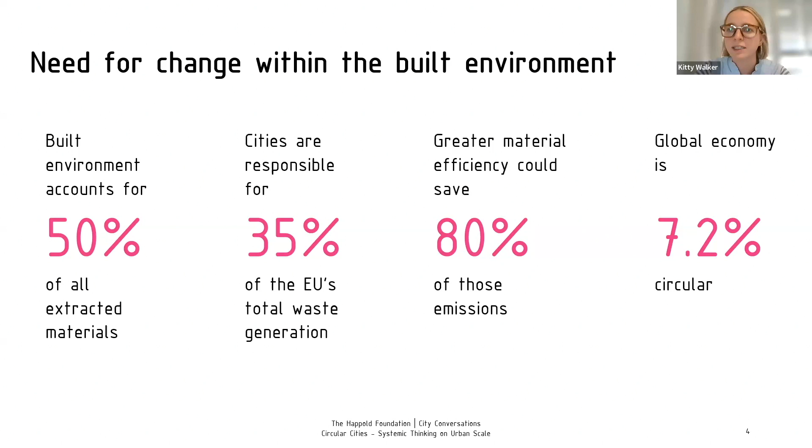However, we are seeing some shifts in the industry, with material salvaging ever increasing and recycled material development progressing. Some bricks made out of old recycled plastic and bricks made from waste within the construction sector, and some interesting projects using reused material, which I'm sure we'll hear more about later. So this is why we wanted to explore further material flows, identify potentials in material mapping, and understand more the potentials for mining our Anthropocene.

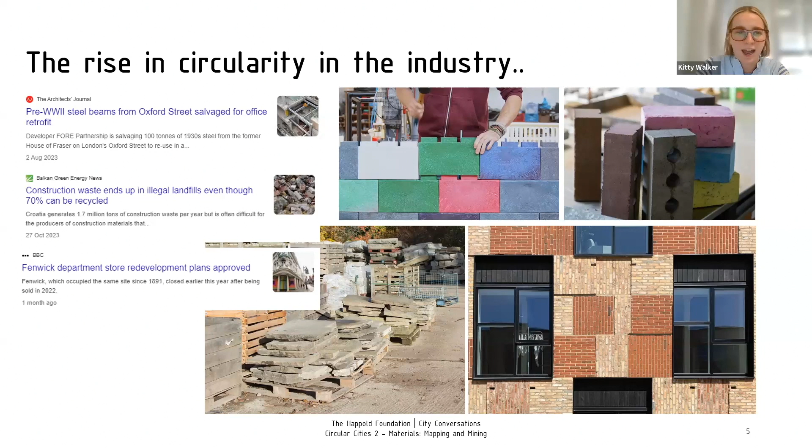And therefore, we've invited 5 fantastic panelists, as they're all experts in the industry, and we're super excited to delve deeper into the issues at hand with them. So we're going to start off with Nico Schouten, who is the team lead of the built environment team at Metabolic, where he helps governments, architects, and developers make their projects more sustainable through circular principles and systems thinking. Metabolic is a consulting and venture building company that uses systems thinking to tackle global sustainability challenges. So yeah, over to you, Nico.

Yeah, thank you very much for having me today. Let me share my screen.

Today I'm going to talk a bit about some of the recent research work that we've been doing at Metabolic. As Kitty already told, I'm part of the consulting branch of Metabolic, where my team specifically focuses on the built environment. And we do research on circularity through all layers, all the way from individual buildings to European construction sector scale. And that is what I want to talk to you about today.

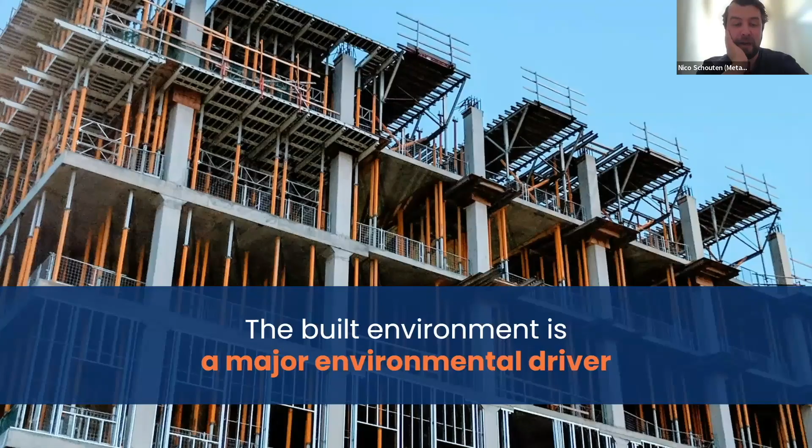So we all understand, and Kitty explained just now, that the built environment is a major environmental driver. And when we look at the annual consumption the European construction sector has, we can see that we roughly consume 1 million kilotons of material. That's quite a bit. That's enough to construct 185 pyramids of Giza every year. And to bring that a bit more into perspective, we've done a very elaborate analysis on what types of materials we are using in what part of Europe.

We visualize this in this material flow analysis, where on the left you can see what materials we are using. So you can see the majority of the materials we're using is reinforced concrete. Then where are we using these materials? We can see Western Europe is quite an impactful region, considering that it's housing a big part of the European population, but also consuming a large part of our resources from a built environment perspective. And then here on the right, you can see where we are actually using this material. So you can see a big part of our material consumption is in residential housing.

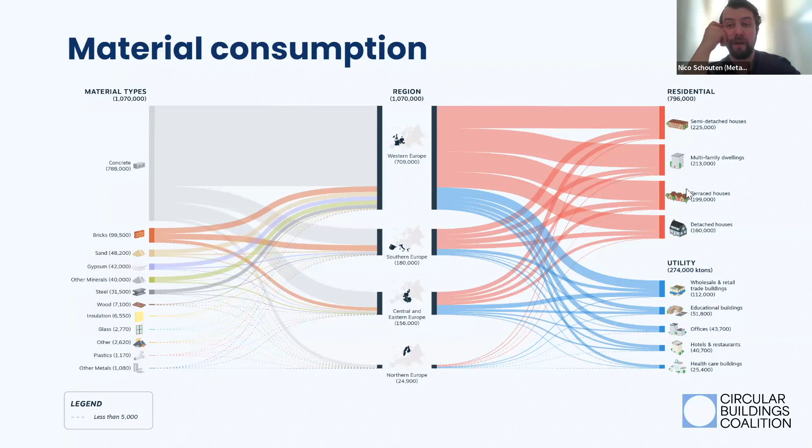We're also throwing a lot of materials away. So the European construction sector on annual basis throws away 106 megatons of material. That's enough to construct a tiny house for every inhabitant of Austria and Hungary every year, just considering the waste that we are producing. And to again have a better understanding what types of materials we're wasting and where we're wasting it, we see that again, Western Europe is a very big waster of these resources. We demolish, even compared to our inhabitants, much more than other parts of Europe. And then again, concrete is a very big resource flow.

When we look at where these materials are going, we can see that the vast majority, 70% of all the waste becoming available through demolition activities, is currently being backfilled or recycled. And the circularity of the high value reuse of these materials is currently not even known or very, very limited.

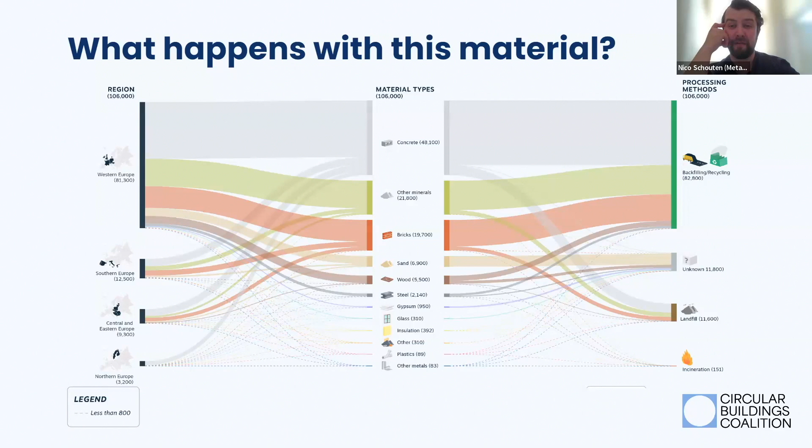This is causing a lot of CO2 emissions. So all this material consumption, if we keep building this way, we will emit roughly 7 gigatons of CO2 emissions until 2050. And that's, of course, a very big problem because it will mean that we cross our planetary boundaries. A very famous planetary boundary is the climate change boundary, where we know that if we cross the 1.5 degrees scenario that we also agreed on in Paris, if we want to remain within, we might actually have

some very serious problems. And if we keep constructing the way that we're constructing now, we can see that we will cross, as a European construction sector, this budget or this boundary in 2026. The 1.7 degree follows very quickly after, and then if we don't change anything, we will cross the 2 degree scenario in 2033. So that's quite an alarming image.

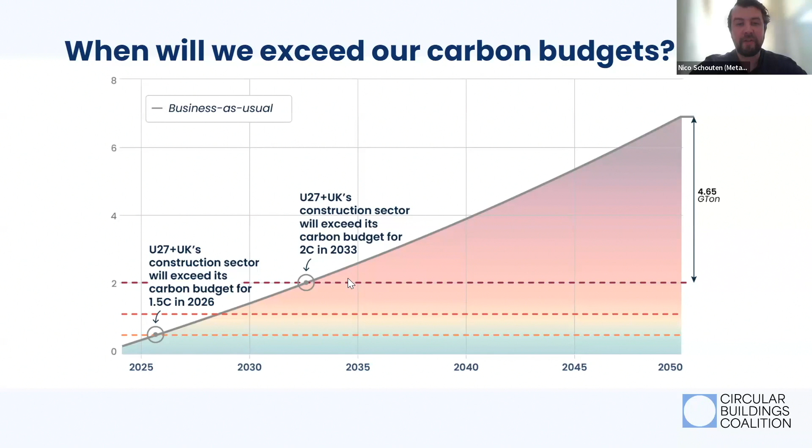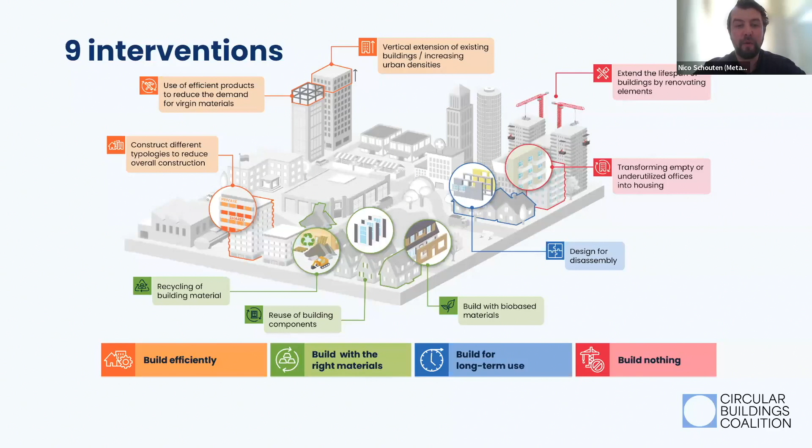And to better understand how we could deal with this environmental impact, we've been modeling 9 different interventions. So this is very broad, from transformation of existing buildings to design for disassembly, building with bio-based materials, and also the recycling and the reusing of building components. And since that's very relevant for today's topic, I want to dive a bit deeper into what this reuse of materials actually could look like when you take it back to the city scale.

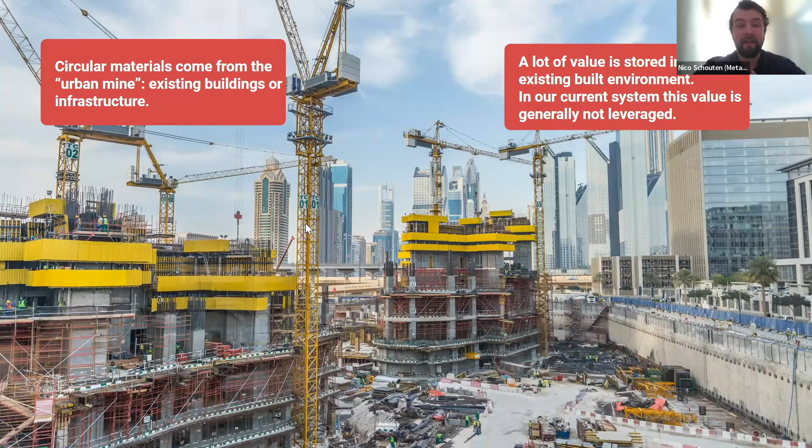So to talk a bit about cities and urban mining. When we talk about the urban mine, it's a very well-known concept, but we see really the buildings that we've constructed over the past centuries as mines for future reuse. But to do that, we need to think about a scale that reuse is valuable and even possible. And to gain a bit better understanding, we've mapped the city.

So this is a material flow analysis of Rotterdam, a city in the Netherlands, where on the left you can see all the materials flowing into the city. So energy, food, consumption goods, but also construction materials. And then on the right side, all the materials that become available on an annual basis. So a lot of organic waste, and also on the right, of course, what's currently happening. For the construction materials, we currently see that there's a lot of downcycling, which is very similar to the European picture that I just painted.

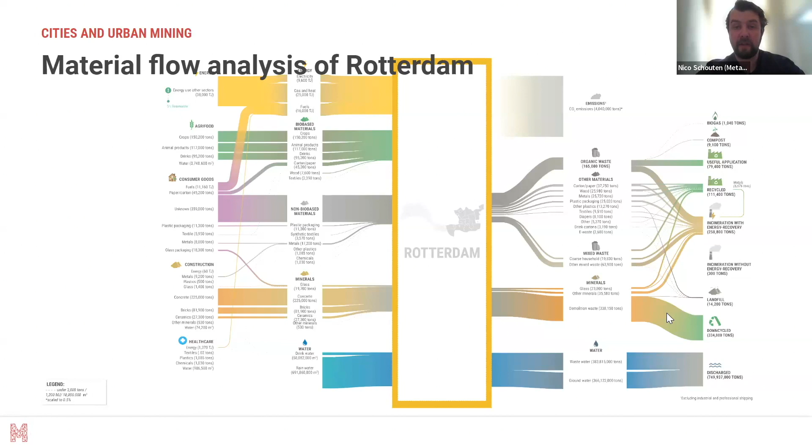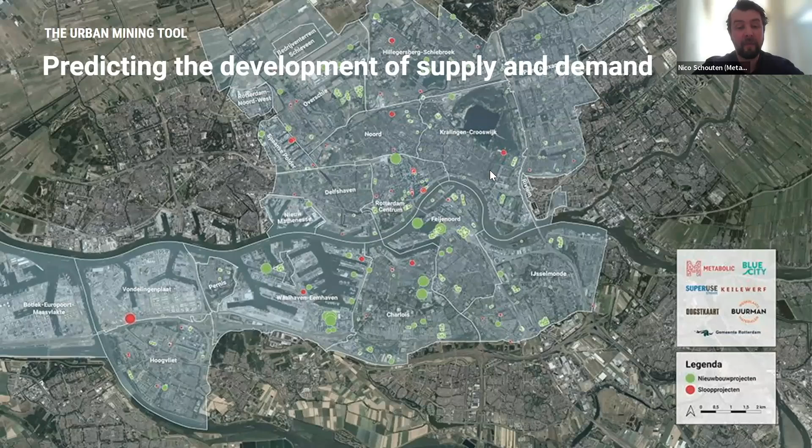How we map this material flow and the potential of this reuse is by looking at the construction and demolition plans of the city of Rotterdam. So what you see here is a map with all the construction plans, which are green, and then all the demolition plans, which are red. And when we just very quickly compare those two and try to match supply and demand, we can see that until 2030, there's only 229 demolition projects.

But there's over 4,000 new construction projects, with 250,000 square meters of gross floor area being demolished, but over 5 million square meters of gross floor area being constructed. This is already a very clear indication that even if we reused all the materials becoming available through demolition activities, we will never have enough to replace the virgin material demand if we want to, of course, also construct the housing that we need from a social perspective.

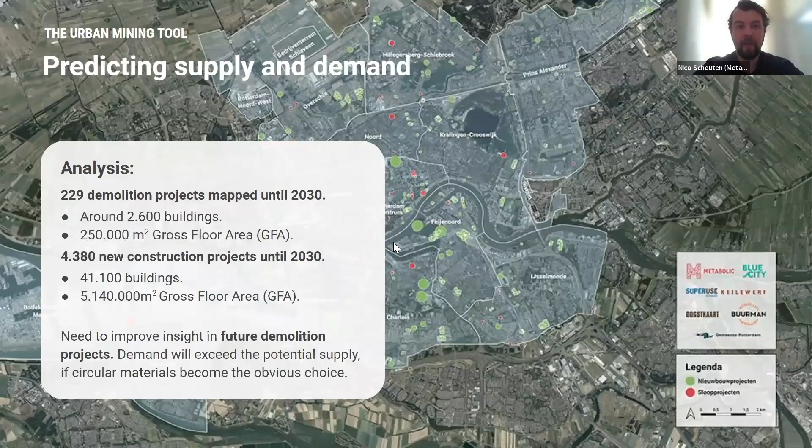This analysis also really allowed us to make a very clear spatial and time analysis of when materials would become available, because as we are still in a linear economy, we kind of have to catch these resource flows before they are lost to the linear system. And what we saw is that it does really matter when you harvest these materials or when you have this infrastructure available to close these reuse loops.

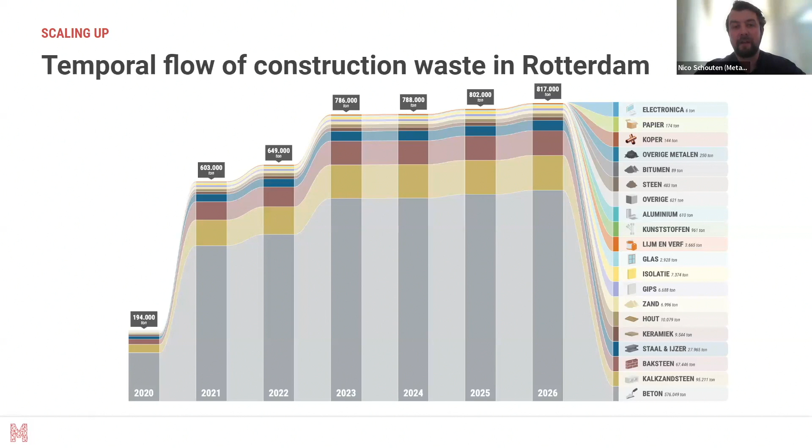So between 2020 and 2021, there's a very big increase in materials becoming available. And then 2022 and 23, again, a big leap. And this insight really helped our clients, which were the municipality of Rotterdam, to understand that they really needed to make haste if they wanted to capture all these valuable resources before they were being downcycled or landfilled.

What this analysis also focused on is that circularity is not a goal in itself. We don't have to just reuse materials. We reuse materials to reduce the environmental impact of our construction sector. And what we show here in this analysis is that if you compare the mass of the resource flows becoming available in the city of Rotterdam, environmental impact and the cost gain that you could have through reusing these resources,

we can very clearly see that if we want to prioritize the environmental impact, some very important decisions have to be made. For instance, here you can see insulation materials, which is a very limited mass, has a very high environmental impact, but has a very poor business case. On the right, we also visualize how certain hurdles would make the reuse of these materials harder. So it's about standard sizing, risk for pollution, or the warranties for good functioning of that.

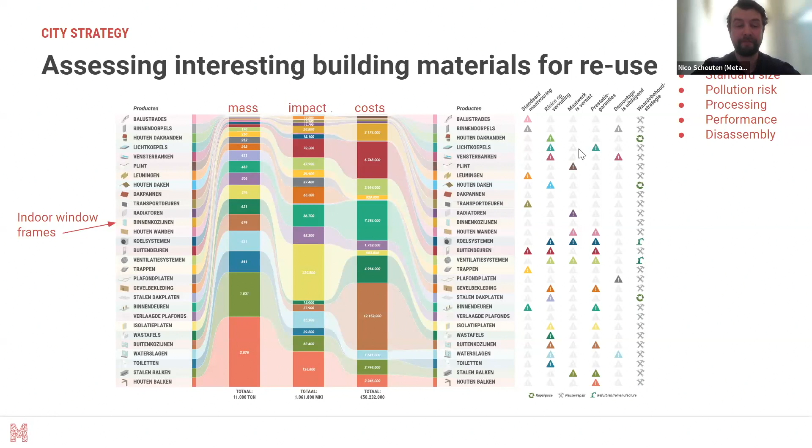But really understanding these resources and also understanding what these resource flows could look like, we then map those flows through the industrial process and profile of the city of Rotterdam to understand that maybe if you want to reuse concrete at a large scale, you really need an industrial plant where these resources could be cycled and repaired or even recycled, which might not happen very much within the city.

For other resource flows, such as doors or windows, the reuse or recycle process looks a lot easier. And then making a more localized chain actually really helps by also creating a healthy city, a vibrant city, and also a city in which there's jobs for a larger audience.

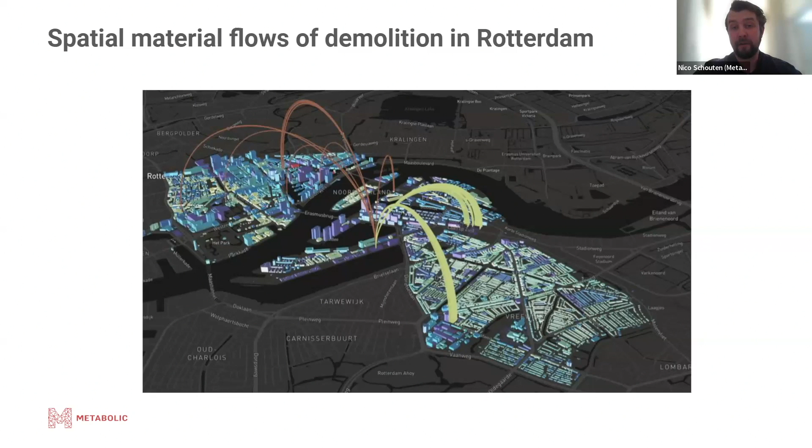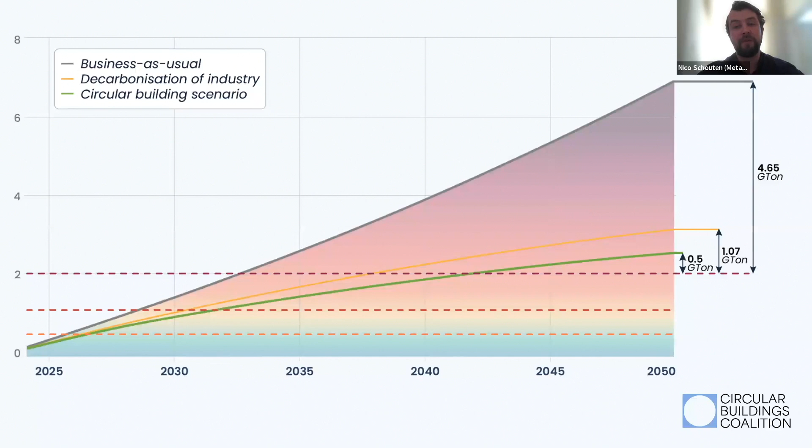Through decarbonization of industry and applying this broad range of circularity scenarios or interventions, we can reduce the environmental impact of the construction sector by 70% in 2050, and also push the deadline that we're crossing the 2-degree scenario by roughly 10 years, which means that we really buy ourselves some time to focus on further innovation and really applying the best of our skills to get a construction sector that is within.

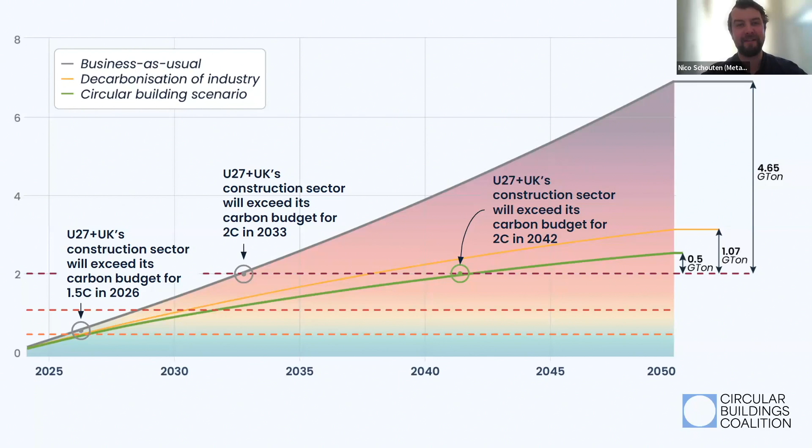That was super interesting. Thank you. It was really nice seeing all those maps and I feel like you could delve so deep into all of them. But I just wanted to quickly ask you before we move on. We've spoken to a lot of people and they've said that finding the right data and putting it to use is a massive challenge. And did you find that when you were making the maps on Rotterdam?

Yeah, so there is a very big challenge, but what we did with these maps of Rotterdam is that we've used a large database with reference buildings, which could give a first insight into the potential of these demolition plans. But then reusing these products and actually harvesting them does ask a lot of on-site scoping and scouting of materials

and also repairing them. So the work that we're doing is very much at the beginning of the process to show different stakeholders, so both public and private parties, the potential that lies before them, but then really getting on the ground and doing them does ask, of course, a lot more work and innovation.

Great, thank you. So now we're going to pass on to Andrea Charlson. So Andrea is the Managing Director for Madaster UK. She's now bringing material passports to the UK to transform how we value buildings and materials through the use of reclaimed materials and designing to facilitate future reuse. Madaster is an online registry for materials and products, and on Madaster, data is recorded on all materials and products that can be incorporated into future real estate. So over to you, Andrea.

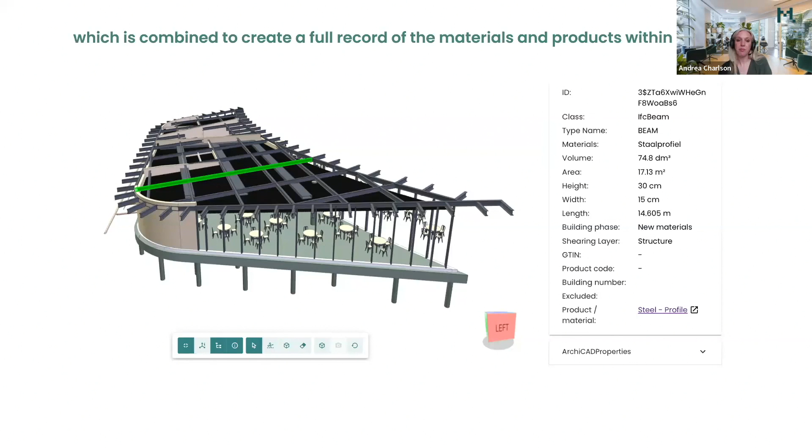Once we've got all that information, we can then start to unlock a whole range of environmental impacts and insights, such as what materials are located within the building or the asset and where are they. We can start to explore the circularity, and so that can be both what I like to call its circular history. So are those products already recycled or reused? And also its circular future or potential circular future. So are they available for recovery, and can they then be reused or recycled once recovered?

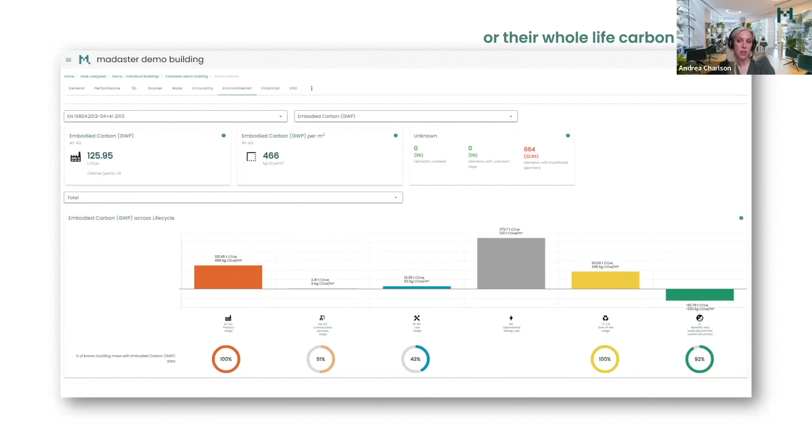We can also use the same information to assess a whole range of environmental impacts, such as the whole life carbon of both the materials and therefore the assets that are created from the materials. So once we've got that information, as well as having the repository of the data itself, we can start to calculate KPIs for the whole asset. And this can be useful to support building level reporting requirements, such as those in green building rating schemes or planning requirements.

But most interestingly for the topic of today, and touching on what Kitty was just asking and what Nico was describing, the information on the individual assets can then be aggregated across either a portfolio of assets owned by a private entity or even a public entity, or even across a geographical region. And so this is an example here where we created asset level records for all the buildings within this village, which is a subset of Heidelberg. And then we can start to unlock some of the insights that Nico was just describing, sort of what materials are in those buildings, where are they, what's their circularity potential, when they become available.

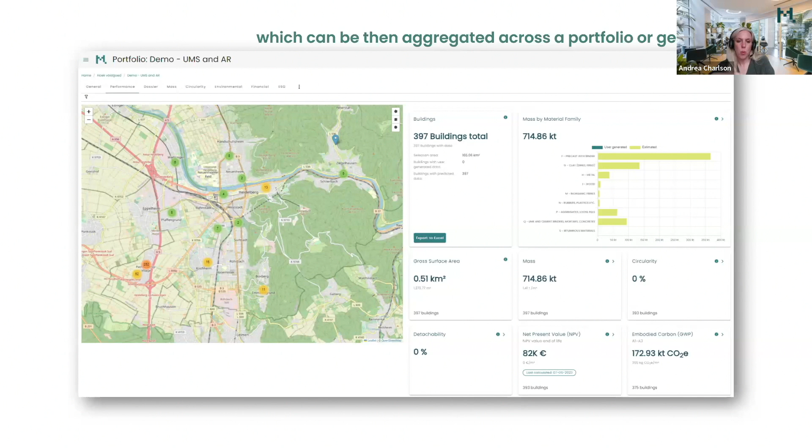And so that's kind of the mechanism of what we try to do, or what we try to facilitate through the platform. But why do we do all that is probably quite an important question as well. And the reason we do that is to provide both the data and information to support a wide range of needs. And some of that data and information helps support data-driven decision making, so to actually change what happens. And some of that is just to facilitate an easy and efficient route to reporting. The type of needs that our users are interested in are quite varied.

So we are established with the idea of promoting a circular economy, and the idea of having this information available at all the various levels, so product and asset and portfolio or region, can help promote a circular economy in lots of different ways. The fact that we can make that information available throughout the design and construction phase means that it can also be used to inform decisions about those design and construction processes. So you might want to choose to design something in a slightly different way or choose a slightly different specification of material or product.

Very specifically in London, this kind of information can help support planning requirements, both in terms of the KPIs themselves, but also the act of creating the passport and creating that record of what's in your building. And then moving more towards the asset and also the portfolio level, collating this kind of information can help streamline ESG reporting, particularly with the requirements that are coming down from Europe through the EU taxonomy and CSRD.

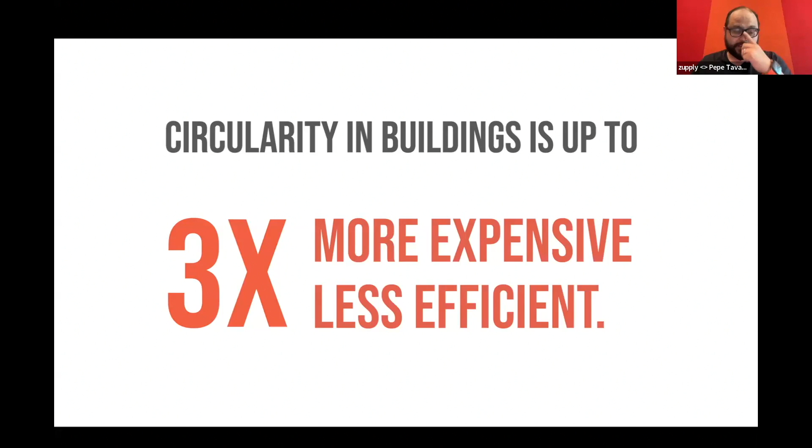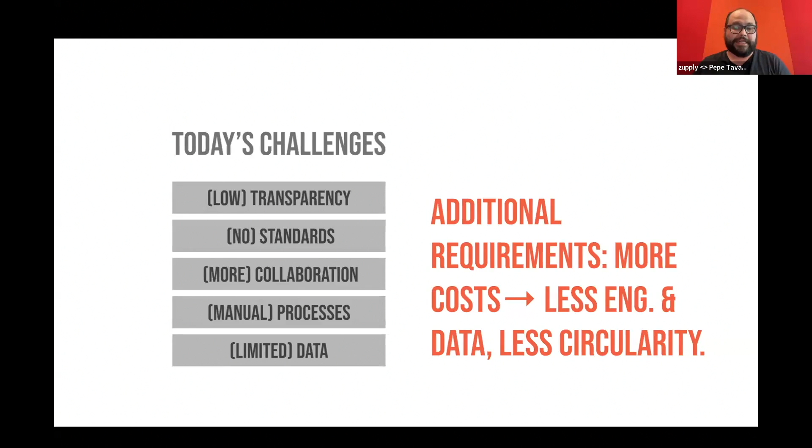In very short, what does it mean? Companies right now, all the way from portfolio level to product, if they want to do some sort of circular economy practice, it's more expensive, and that's why it's not very widely adopted today. Why is that? Because there are a lot of challenges on one side, but also a lot of additional requirements on the other. So I think it's a very simple business proposition: if there is more cost associated with circular economy, then there is less engineering, less data, and ultimately less circularity. I see that this is not very widely adopted, at least here in Europe.

Actually, the data we've seen more practically on the ground is that less than 1% of resources follow any type of circularity. And I don't mean circularity as in when it gets taken back or resold or reused—I mean even less than 1% today is getting mapped. So this is somewhat alarming, but I think when we balance this impact-driven but also business-driven situation, it's why we are not reaching that scale.

On the other side of the spectrum, and that's what we have been seeing, is that the data requirements or the engineering design requirements for circularity to happen are actually trivial. They're not crazy requirements. However, there is a lack of data around them.

So to answer these very basic questions: what's inside our buildings, what's their worth today, in the future, and what is their CO2 through their life cycle, but also their cost through their life cycle. These are questions still a little bit up in the air that, at least in Zupply, we are trying to solve. Once you add on top of that the layers of, okay, now I know what I have, now I know what it's worth, then how can I actually circulate them?

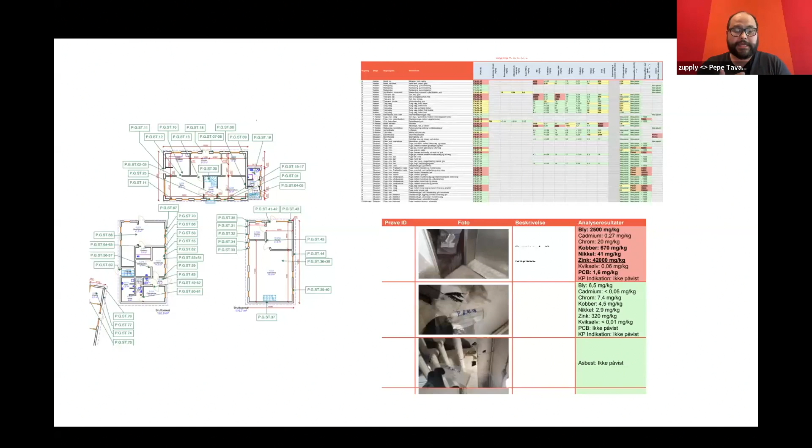Think about it: you spend 20,000 for 1,000 meters, which is nothing, and you get some report looking like this, which is basically telling you here we have X and there we have Y. There is some testing, etc. But that's what people are working with today - very low digitalization, but also very low connectivity.

And that is just, let's call it, the first step towards mining. You need to know what you have. Still, there's a lot of many other requirements that, again, are costs, are time.

Because what we have seen is that all these circular efforts or circular requirements are being taken in manual ways right now - a lot of Excels, a lot of exchanging data through emails. There is no material passport that everybody can access or dig into. It's more exchanging information through emails. Data banks look very similar to reservation systems. And this is simply very time consuming and expensive.

That's the monster we are facing. But we have tried to fix this by streamlining every requirement needed to go from what we call resource mapping to actual circularity of resources and reporting, but also from portfolio to product level. And that is what's very interesting for us, because this is how our platform works.

So we start by creating digital twins on the portfolio level of buildings - meaning more or less what would be in there. We use a lot of models that we have created to actually fill the data blanks on portfolio, building, and product level. And that gives us the resources to be ready for circularity, what we call them.

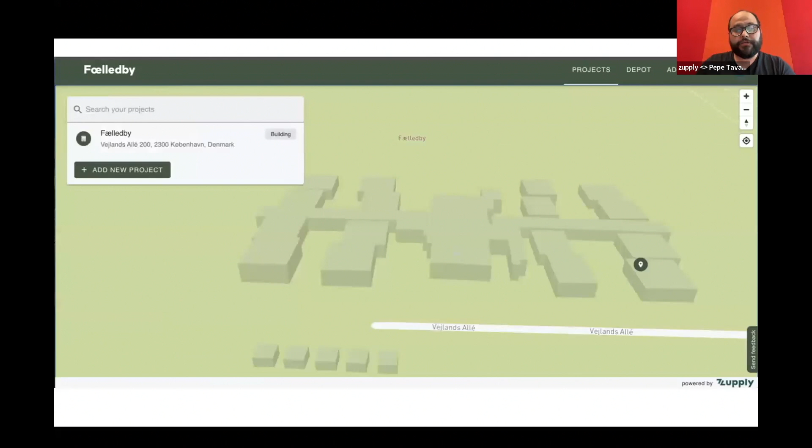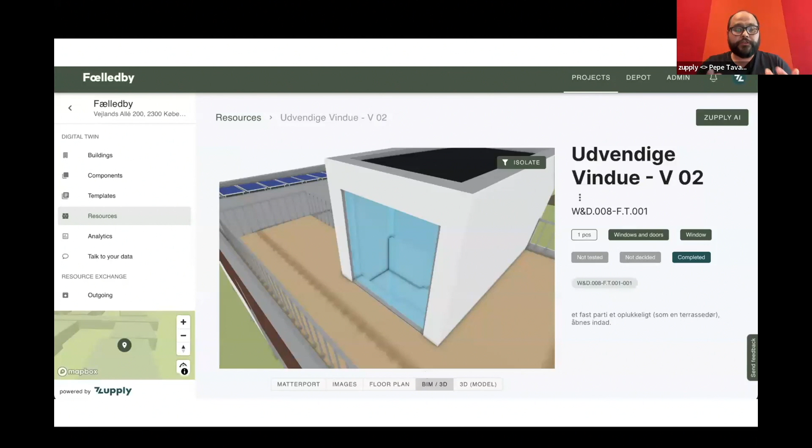Our databases, drawings, whatever information, you basically dump it into the platform. And that gives us a very detailed resource mapping, so detailed that we know not only the product level, but the composition, cost, carbon, anything that you can think of that's needed in a material passport. We are able to get it because we use a lot of AI to do so.

We are so excited about what we are building that we have actually proven to give this data widely available. We have an embedded engine that anybody can access and ask any question about the material passport or the portfolio level. So right now there is no more exchanging or handing over the material passport, let's say.

So right now everybody can access and collaborate within the same platform, which is a difficulty that we've been seeing when talking about circular flows. We've gathered so much data that right now we're not doing digital twins only for existing buildings to be demolished or renovated, but everything that gets newly built or renovated is digitized and stays in our digital twin, because that allows for future circular flows, such as product as a service and design for circularity.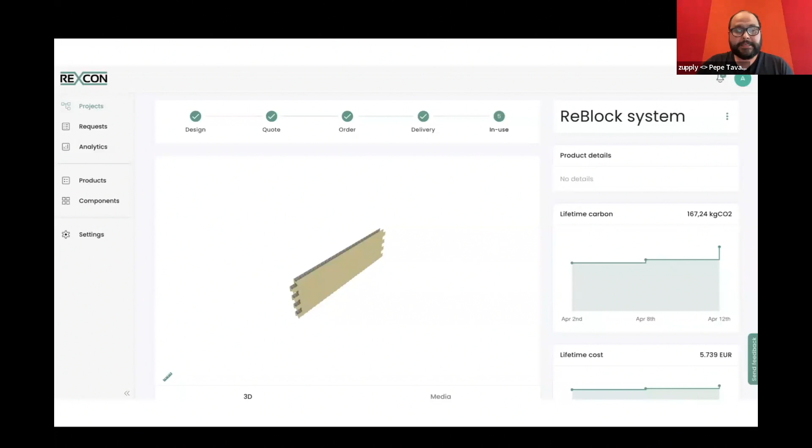We actually are doing it already, where companies are doing their full circular operations with our platform, but instead of starting from a mapping, starting from the moment they produce or manufacture the products all the way to the take-back. That has proven to reduce the cost and makes circular economy in building products competitive. We've proven with the most important companies here in Denmark and also in other places in Europe that they are going four times faster and more affordably with the circular economy.

So meaning we're almost there in terms of competing with business as usual, and the impact is there. Once you make it competitive business-wise, we have proven that we can reduce up to a quarter of the waste that would be generated. And that is just awesome. We are actually making circularity happen.

Thank you very much. Before I conclude, companies at the portfolio level, like Ikano, the IKEA real estate developer, are actually telling us the same thing - if you go from portfolio to product data-wise, you can make circular economy efficient, and that's what we've been trying to do. Thank you very much, and that's all for me.

Thank you, Pepe. That was great, super interesting to hear what you're doing. Similar to what I was asking the others about with the data, how do you ensure accurate data? I know you're making assumptions, but are you partnering with architects or part of the design team? How is that coming to you?

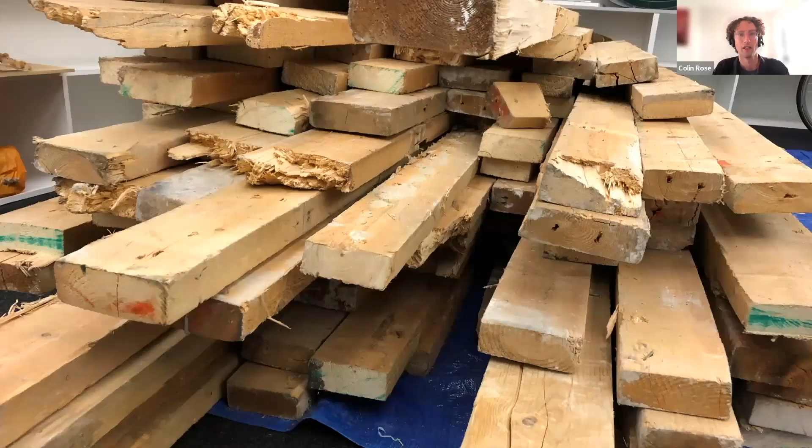But not having that sit in an isolated way in a PDF, but instead being submitted to planning and then collated into some overall map - not a map of everything in the existing building stock, but a map of the most pertinent information, because these are the materials that are soon to emerge from demolition.

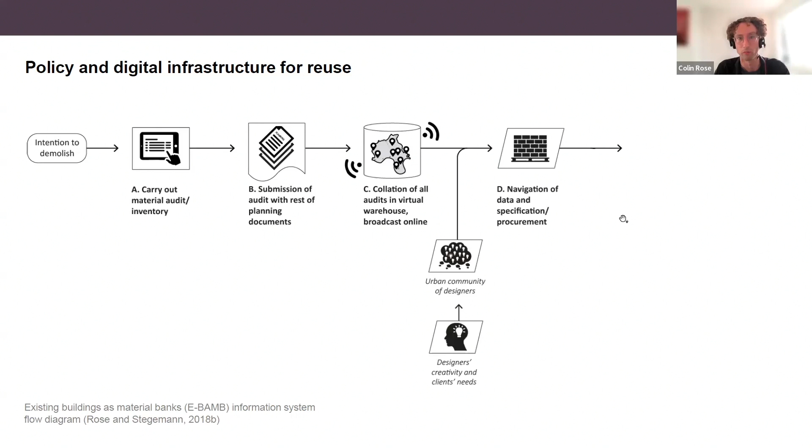Which then, once it's visible and mapped in that way, gives you the ability to leverage all the creativity and community of urban designers who know all of the specific requirements of their clients. So instead of an auditor trying to anticipate what's reusable and what isn't, you use this collective intelligence. That can then lead into either direct reuse from one site to another, but probably more likely at scale, a third-party upcycler or someone doing repurposing or some kind of value-add, which enables the end user to have confidence in the quality and the timely quantity of materials getting to the new construction site.

And then the system can have a kind of feedback loop so that it's learning over time and becoming more intelligent.

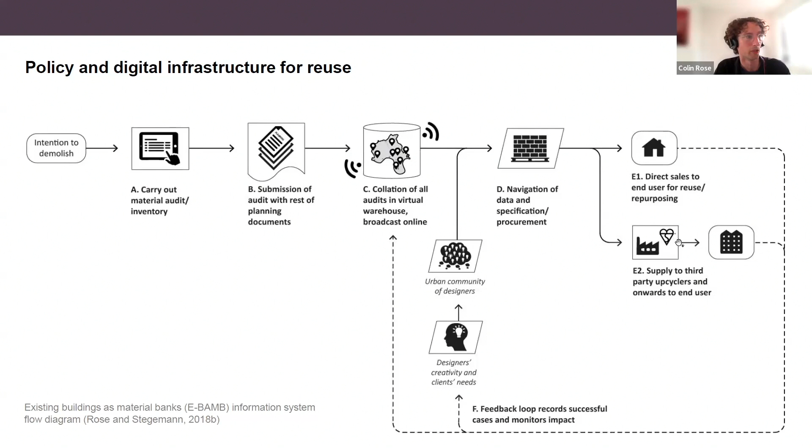So to sort of sketch that out as an overall way to stimulate a reuse market, I think I've talked there about policy to drive better information about materials and feed that into a digital infrastructure. It's also fired up. The system is incentivized through policy that drives more reuse, for instance, by having separate reuse targets to recycling at the supply end, as well as the demand end, reused content as well as recycled content. But importantly and crucially, I think, new material technologies and enterprises at the middle who really make this engine turn over.

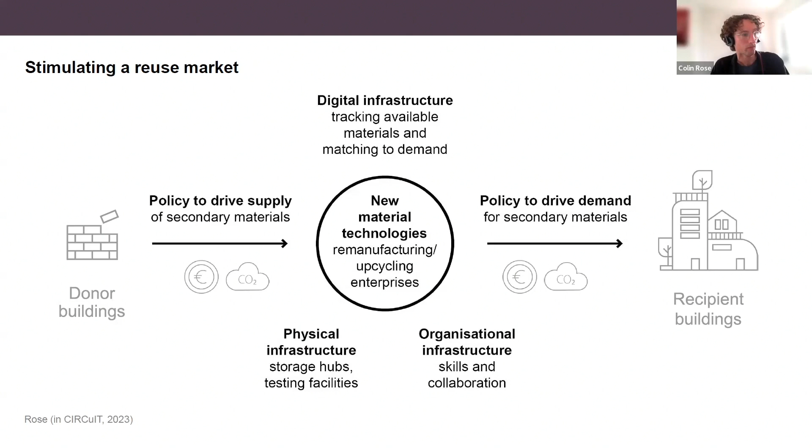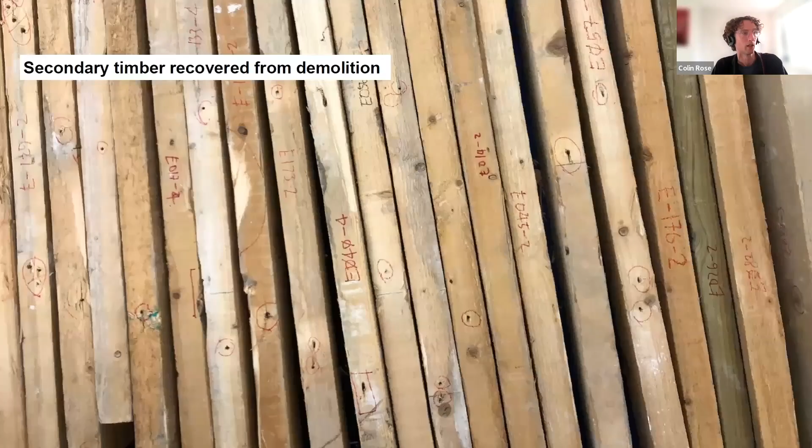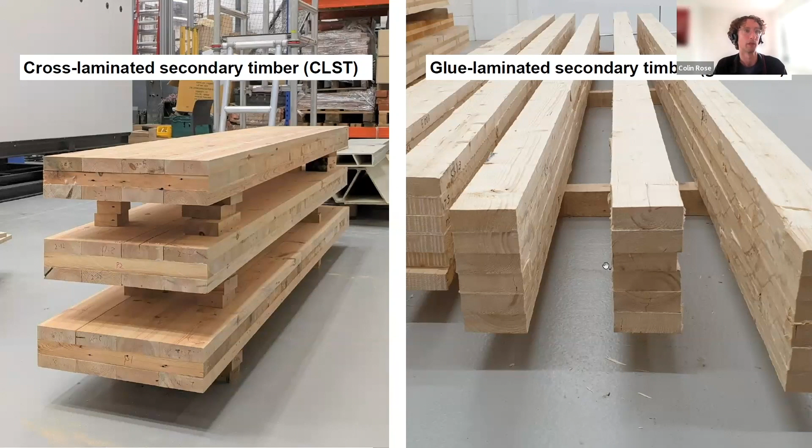So that's where the example of UKCLT comes in. We've set up UKCLT with a view to commercialization of the research that we've been doing, which is quite simple: taking secondary timber, so timber coming out of demolition, and using it as feedstock for mass timber. So what we're calling cross-laminated secondary timber and glue-laminated secondary timber. So this is the kind of schematic of what that looks like.

So there's vast quantities of timber in our existing building stock, more than in forests planted for timber generation in the UK. Diverting it away from current waste management, which is all about chipping it, some recycling into low quality products, and a majority of incineration, and instead into a more local remanufacturing industry. So therefore creating jobs locally, as well as reducing the distances that mass timber would have to be transported from European manufacturers, or displacing other structural materials with higher impacts.

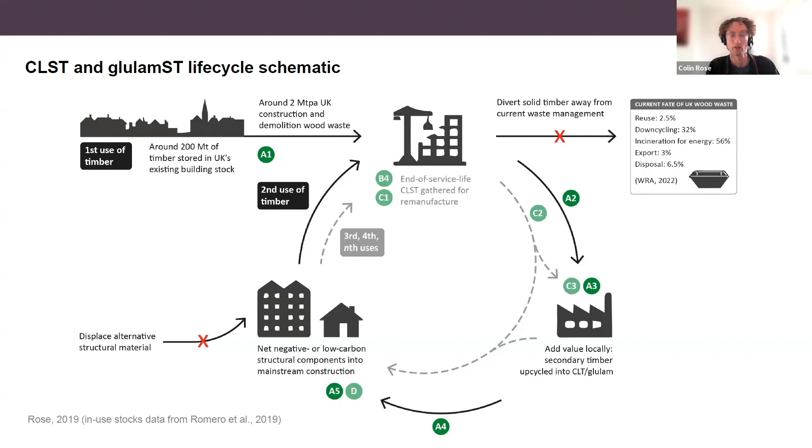And preferably doing that with a product design which enables future disassembly, so that the grey dashed line on the inside indicates those same components coming out of a building being repaired, improved, upgraded, and used again. And the impact there is all about life cycle of timber, because the longer you can keep timber in use, the longer it continues to sequester carbon.

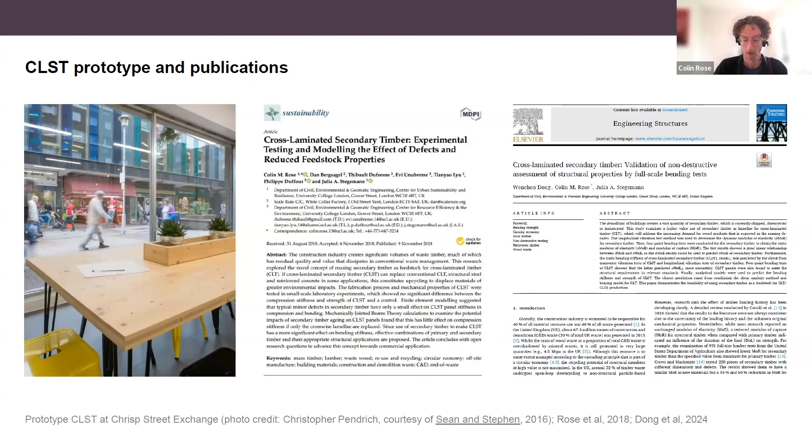So we've been doing this for a little while. We made the first prototype back in 2016, and we've been doing the background science, publishing papers that do some structural testing of its performance, with overall pretty good results. We set up UKCLT a couple of years ago now, as I said, for the idea of commercializing this in the future.

Just to give you a flavor of what we're working on now, this is a current project that's taking the material out of the world of material science and into the world of products. So it's being used as the components of a Portakabin module. So we're building this at the moment. In the middle is some of the timber feedstock that we've gathered and denailed, sorted, ready for finger jointing. And then on the right, that's yesterday, some fresh glulam coming back from where it's been pressed.

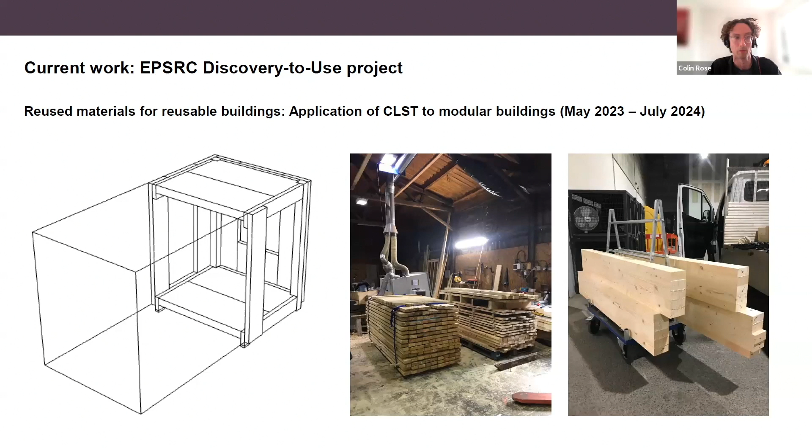Great, thank you. That's really, really interesting. Just wanted to ask about, you have all these sites to improve the quality of the timber before it's being reused. In a city like London, where space is such a challenge, do we need to see a shift in policy to support these spaces, or how can we bring about those spaces in a city?

Yeah, I think it's a really good point, and one of the biggest challenges for any sort of business working in this sort of space hungry way. I think there is increasing interest from local authorities in trying to get sites that enable these kind of circular supply chains. But I think that would probably be a first step of gathering and sorting materials, so that then something like UKCLT or other specialists that are going to use a lot more space would be further out of town. But definitely something that needs to be supported in policy.

Yeah, for sure. Okay, and then lastly, we'll pass over to Julia Barfield. So Julia is an architect and co-founding partner of architecture practice Marks Barfield Architects, which was founded in 1989. The studio's award-winning projects include the iconic London Eye and the British Airways i360 in Brighton, and have earned Barfield an MBE. Their practice focuses on sustainable urban development and retrofitting, which has won over 100 awards. And Julia was also involved in the urban mining Tondo that we're going to hear about a bit later on. Thank you, and over to you, Julia.

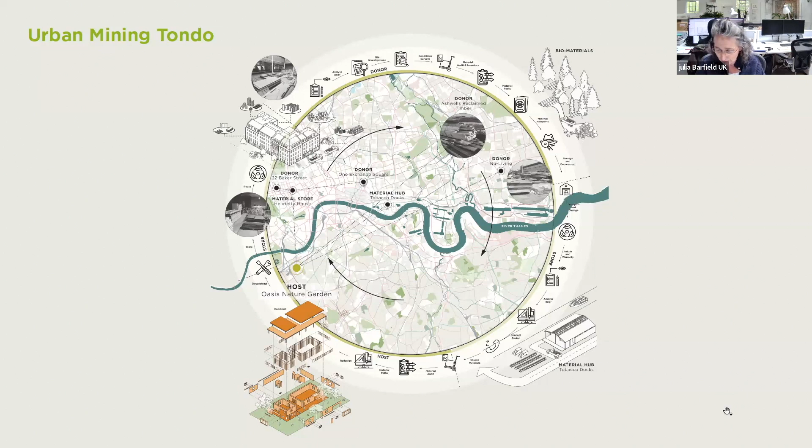And, you know, the need to turn that around somehow. So we've been concentrating on retrofit and the circular economy. And this was an image that we produced recently to show some of the projects that we've been working on. I'm not going to dwell on this at the moment. I'm going to come back to it.

So very much moving to, as has been talked about, mining the Anthropocene, moving from linear to circular, and focusing on retrofit. And this is a practical project that we've been trying to test these processes out on. It's in Baker Street, and we started doing this about 2 years ago. The idea was, because it was a building that had recently had a retrofit, we were just trying to keep as many of the materials as possible on site, ideally, and if not that, then move them to somewhere where they could be used by others.

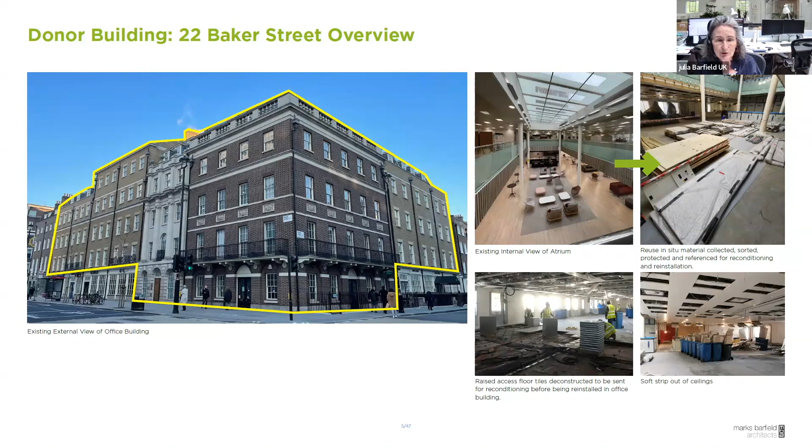And this is the methodology we used. We started off by having a detailed material audit and a condition survey. We wrote a materials inventory, and then tried to identify routes to reuse, as I said, keeping as much on site as possible. And then we also developed material passports. This was a retrofit project, so we worked with ORMS and the Material Passport Working Group to develop this.

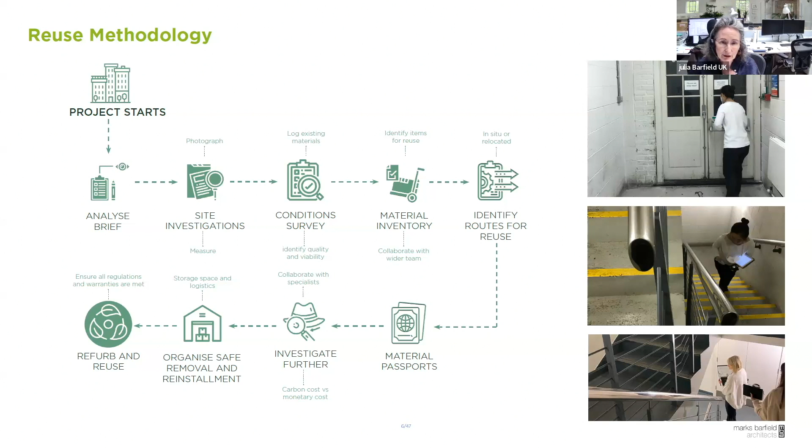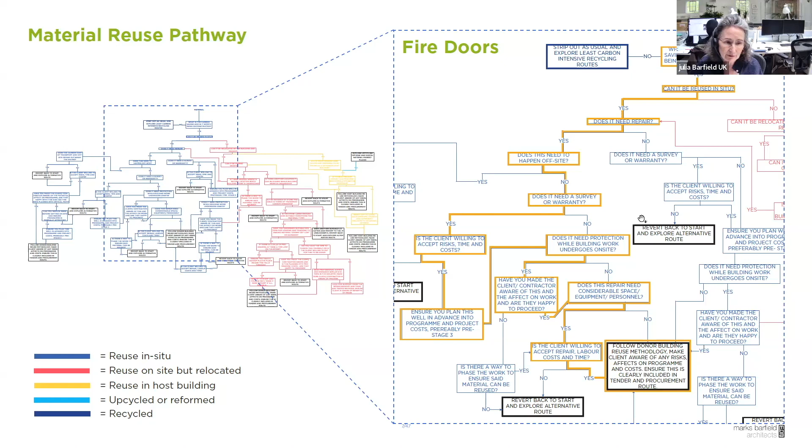We also developed a methodology about material reuse pathways. So it was looking at a particular material and then seeing, does it need repair? Does this need to happen off-site? Does it need a survey or warranty? And there was a yes/no matrix here, which then took us down to whether it was actually worth keeping the material or not. And for all the materials, we developed this pathway and methodology.

And then we also developed the material passports that we tried to make as simple as possible. It's just in Excel format and includes information on the refurbishment requirements, the history and maintenance, and previous works. So much of the vital information was lost previously, even though that building is only a recent building. It's only 20 years old. There was so much lost that we wanted to try and make sure that we could put that right in the future.

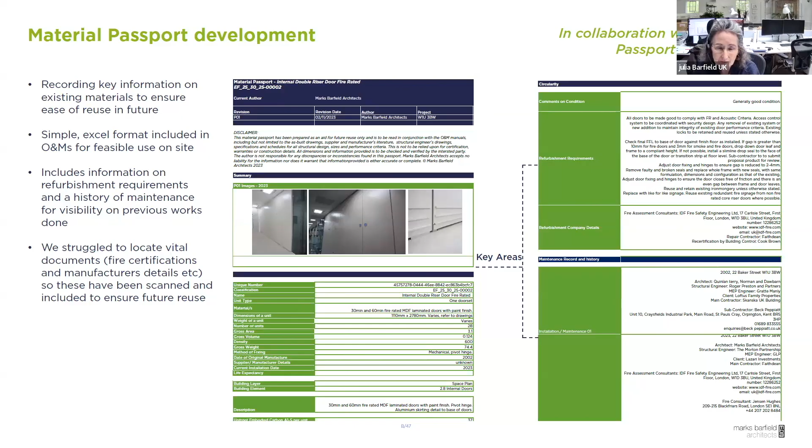So then this shows really the success stories on the project. So we saved all of the raised floors. That's an easy win; I think it's commonly known now that it's an easy win. And it was a considerable carbon saving, but also a cost saving. And the more unusual one was the internal fire doors. So we actually managed to save all of the internal fire doors. This was quite complicated because we had to make sure they were recertified. But I think we showed that it's possible. And here again, there was the carbon saving, but also the cost saving.

And it did take quite a lot of time up front. But what I would say about that is that if we, for instance, had been designing new doors, at stage 4 we'd have had to do detailed drawings of the doors that we didn't have to do. So even though it took longer up front, it would actually save time further along in the process. And this is obviously the first time we'd done it, so we learned lessons and will probably be more efficient next time. But the other things we managed to reuse were all of the concrete pavers, the timber fascias, and so on and so forth.

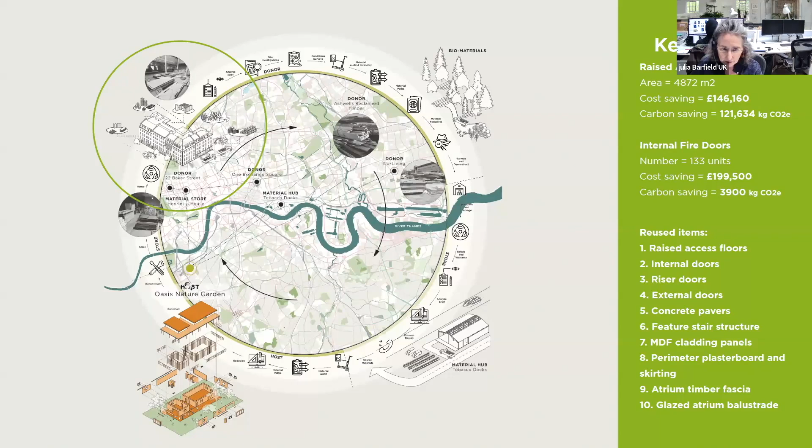And so coming back to the Tondo, this is the Baker Street building, and what we were doing is, of course, using as much as possible on site, but then we actually stored some of the materials to use on a host building. So 22 Baker Street became the donor building, and then a project that we were working on in Stockwell became the host building, and this was a nature garden, a project for a forest school nursery and the nature garden in Stockwell. And what we're trying to do is build it entirely out of reused material; we'd set ourselves that as a goal.

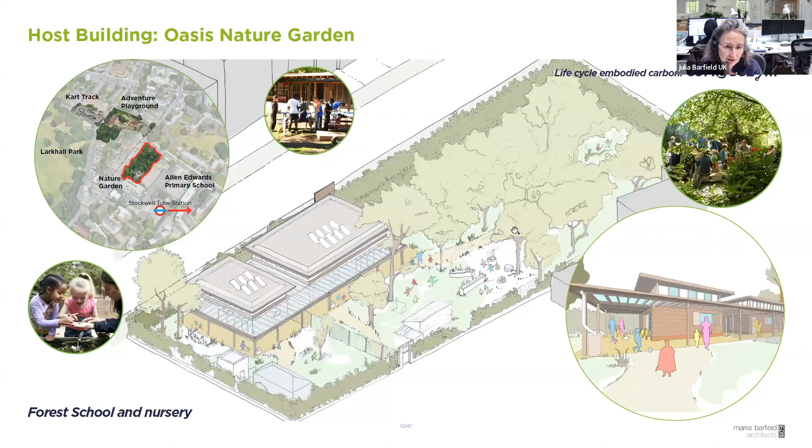And this is the kind of methodology that we developed for reuse, looking at the brief, looking at gathering the materials from all different places. You can see the picture of all the materials here. So these, for instance, are stone blocks that came from 22 Baker Street.

We also had contact with a CLT company that did offsite housing, and a lot of the green panels that you see in the drawing on the right were actually coming from the CLT company. They were surplus to their needs, and they offered them to us.

But a major problem that we discovered, and that I think is a kind of major barrier to reuse, is the fact that we designed the building based on the materials that we were promised, but then we had nowhere to store them. And then subsequently the company went bust. So then we had to spend a huge amount of time trying to recover the material, which we eventually did. And they're now sitting in a car park in Newham.

But it just illustrated a problem that, you know, the timings for knowing when a material becomes available, and then the time of them being used in another building, maybe eventually it'll be possible to align that, but I think in the short term at least, it's going to be needed to have material stores. So this just shows some of the other elements that we found.

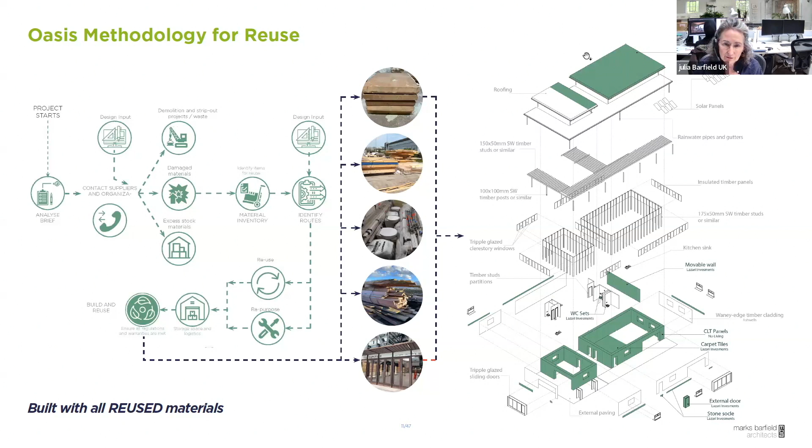So it's been quite a journey. But we've learned a hell of a lot. And I think this is one of the things that we've learned, is that there's a lot of digital materials stores that are being developed, and all really needed. But I don't think we can ever get away from the fact that we also need physical material stores. And of course, we also need to reuse natural materials as well.

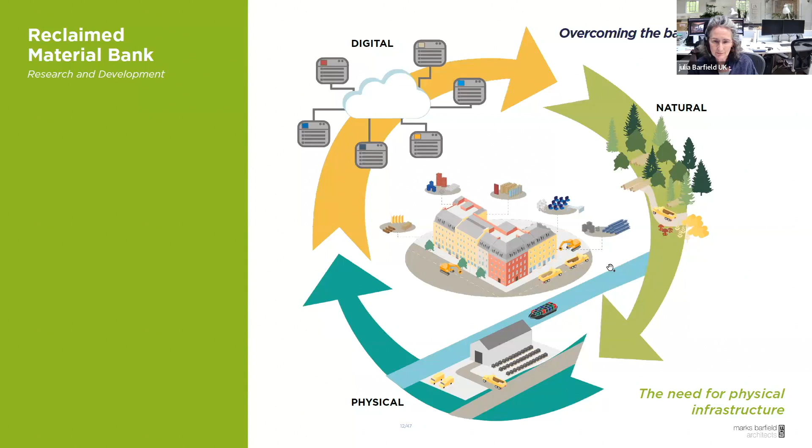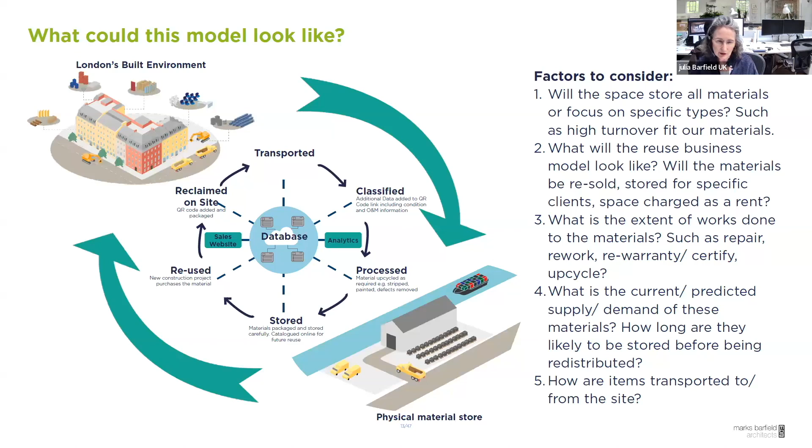So this is a diagram that shows how that process might be done. And in fact, we're talking to a strip out contractor that we met when we were doing the Baker Street job, who's wanting to set up a material store near Tobacco Dock, and we're trying to do that at the moment.

And the question came from the... I visited their office. Oh, yeah. Cool projects they do. Brilliant. They are just so amazing. Anyway.

But yeah, it was an audience question we didn't have time for. And I wondered if the same problem came up in your projects about warrantying reused materials. Did you find any challenges with that in the host building? Yes, of course, there are challenges. But I think what we discovered is that there's ways to get over them.

And with the fire doors, particularly because they were fire doors, we just kept them in place. If we were taking them out of the building and then had to move them to another building, that would have been another level of complication. But because we were keeping them in place, we did get fire experts to come, and we looked at every single door individually, and were able to upgrade them where needed, and then get them recertified by a specialist fire certification company. But yeah, that is one of the barriers, and by doing all of this, we can discover how to do it better in the future.